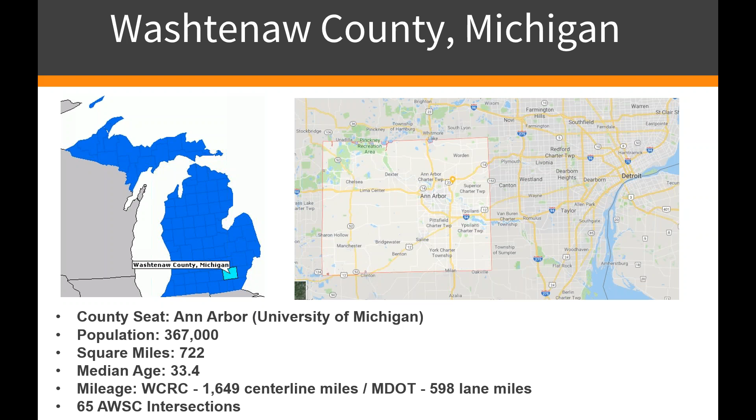So why do we build roundabouts? Well, Phil kind of alluded to this in the beginning. We have safety, and we all know about the Insurance Institute of Highway Safety, what stats they provided dating back well over a decade on what benefits roundabouts have to offer the community. Improved efficiency - not always, but in many cases roundabouts can streamline traffic through an intersection better than a traffic signal can. Can be better for the environment with fewer emissions into the atmosphere from idling vehicles. You have opportunities for enhancement within the center island. But all this can come at a cost.

People like to say roundabouts are always cheaper than a traffic signal, and that's frankly just not true. It all depends on circumstances. A traditional roundabout, depending on who you ask, is plus or minus $1 million. I talked to a gentleman from Connecticut, and he said it was $2.3 million to build one out there for a single lane - he can't even look at it. And that's for everything: design, construction. So it can really be detrimental to a budget.

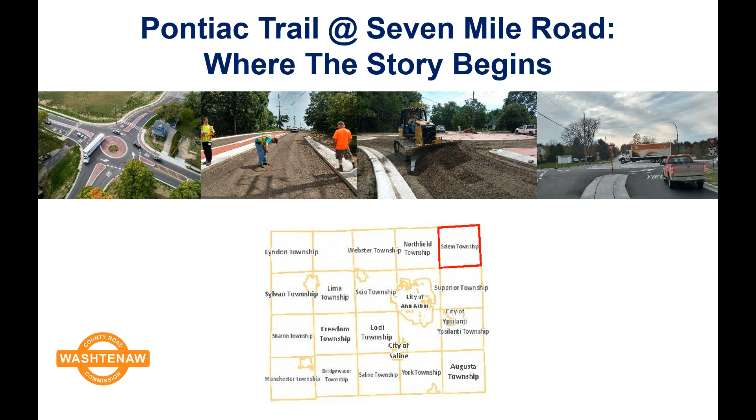So where the story begins: Pontiac Trail and 7 Mile. You see below the county, I've got 20 townships in Washtenaw County. The upper northeast township, Salem Township, is where Pontiac Trail and 7 Mile is. It's an all-way stop controlled intersection. In 2014, we planned to build a traditional size roundabout there, ICD about 140. You can see the party store that is on the right corner there. They weren't so much problematic as, ironically, was the west side of the road, which is the left side, where you see that open area. That's commercially zoned property, and the gentleman that owns both those quadrants there on the northwest and southwest corners wants to build some commercial stuff down the road.

So that's not cheap land. Here's the footprint that we had. Pontiac Trail is the road that goes north and south, 7,600 vehicles per day. 7 Mile going east to west, 4,600. Design speed was 55 miles an hour. Pontiac Trail is a route for a bedroom community from South Lyon to Ann Arbor, so traffic comes south in the AM and goes back north to South Lyon in the PM as people leave their jobs in Ann Arbor.

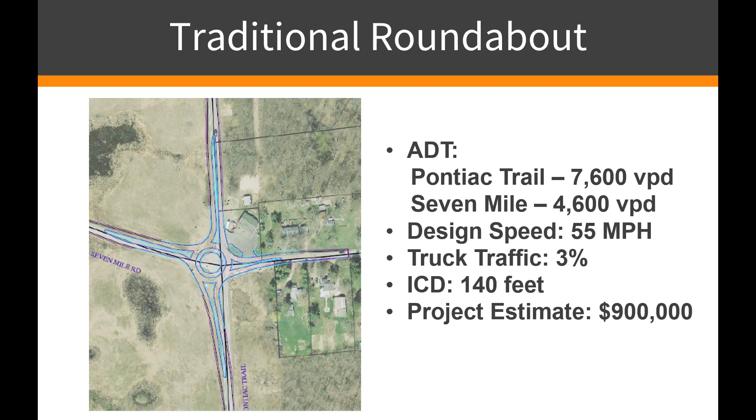The estimated project cost was $900,000. We had a CMAQ grant to reduce emissions out there. The problem we ran into, as you can see from the square footage per quadrant, the party store really wasn't problematic. I was anticipating problems, so I told my designer, here's the limits of your sandbox, and you really need to stay away from that party store. They did a great job. I'm not going to do a total take on a party store—that would be very expensive.

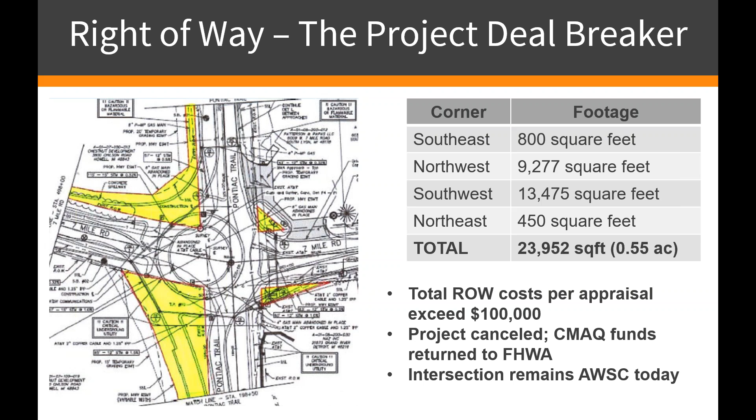So that meant we ultimately went to the west. When the appraisal came in, it exceeded $100,000, and we were not anticipating it to come in that much. The property owner was demanding $300,000. Bottom line, we were not in any position to come close to a number they'd agree to for us to get right of entry and go forward through the MDOT bidding process. So we ultimately had to cancel the project and return the funds. To this day, the intersection still sits as an all-way stop control, which is too bad, because it's the number one highest priority intersection for congestion, and it's still the same way.

Six months later, my bosses came to me on a project called Textile Road and said, 'Hey Mark, what do you want to do, traffic signal or roundabout again?' Pontiac Trail and 7 Mile was in my mind, and I thought to myself, are we going to go down this same potential path where we eat up a lot of cost and maybe have to return money, and this is going to be problematic? Or do we think of something new? Do we live outside the box?

I remembered a presentation from Wei Zhang about mini roundabouts. Wei, you're out there, hello. I thought, can we do a mini here? I proposed that to my bosses, and they all looked at me like I had a third eye on my forehead—this was in 2014. Ultimately they gave me time to investigate. I called up Wei Zhang and said, I have a proposal for you. He looked at it and said, yes, this is going to be a beautiful proposal. This is going to work and work well for your intersection in Ypsilanti Township.

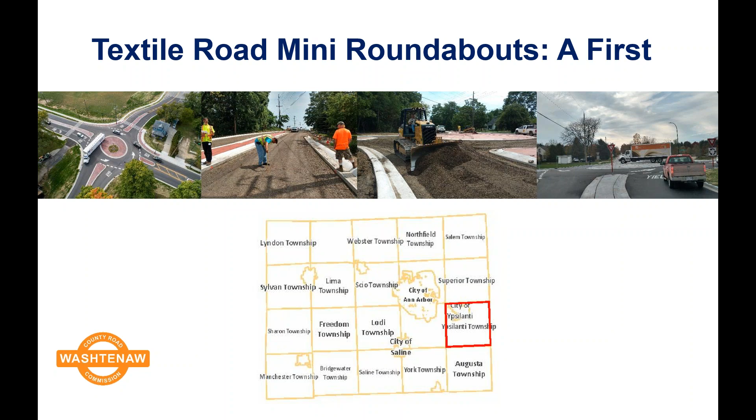Here's the layout. Textile Road goes left to right across your screen, Stony Creek is on the angle, and Hitchingham is the north-south road from bottom to top. We had high-speed approaches, 55 and 45 mile-per-hour design speeds. There's a charter school on Hitchingham Road to the south. Both intersections on the south side of the triangle, not the north, were all-way stop-controlled. It backed up to the point where it took 30 minutes just to get from one side of the intersection to the other through the queue—a major problem.

Interstate 94 is to the north, so whenever there was a traffic closure there, people would alternately use Textile Road to get around it, making it problematic throughout the year. This is ultimately the mini design we came up with. ICD was 90 feet.

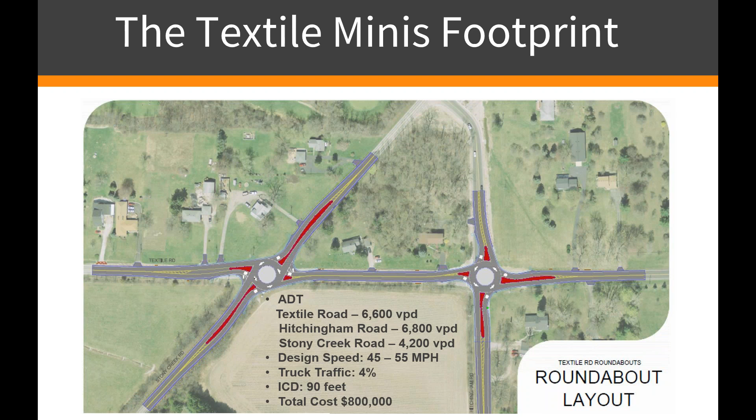ADTs with Textile, left to right, 6,600. Hitchingham, to the right, 68. Stony Creek on the angle, 4,200. Design speed, 45 to 55 miles an hour. Truck traffic was pretty small. The big takeaway: each roundabout, 1 or 2, was $400,000 to build at bid price—that's pretty remarkable. So $800,000 total to provide 2 roundabouts, versus plus or minus $1 million for one traditional roundabout.

Now here's the big takeaway I'd like you to take a look at: slivers of land, not chunks. Recall from Pontiac Trail and 7 Mile how I needed quite a bit of square footage to build that roundabout with an ICD of 140.

In this case, my total acquisition costs to secure easements or temporary grading permits was $3,757. What does that translate into? It means you have more money to build more improvements, purchase more equipment, do whatever your needs are. The pie is the pie. We all know the resources never get bigger, they only shrink with inflation over time, but our needs never go down. By building this smaller size roundabout, we found we can build them faster, design them quicker, get the right-of-way quicker, and they don't cost as much. These are all wins, and they're less intrusive to the property owners directly adjacent to the roundabout.

They do break, meaning if you have an ADT of about 15,000 or greater, they will break. So you don't want to put these in at, say, a 25,000 ADT intersection. They shouldn't be placed everywhere, so you've got to make sure you put them at the right spots.

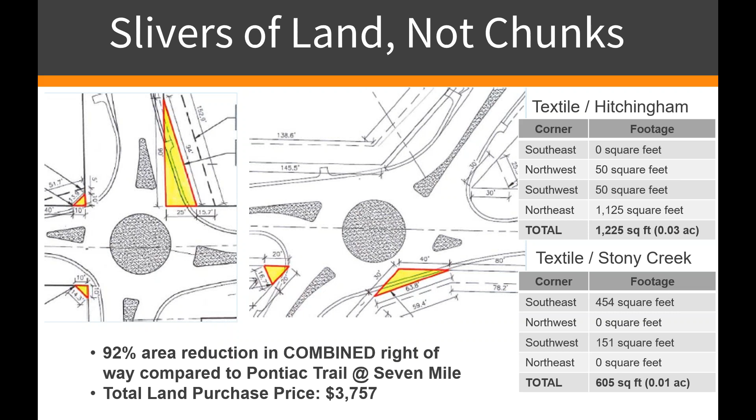So right now we're a little leery to do anything other than all-way stop controls. But as you saw from one of my earlier slides, I've got 65 of those intersections across the county, so I have no shortage of places to place mini roundabouts. That's not the focus of this presentation, so I don't have many slides on that. That was just kind of the big one, and ultimately it turned out great, a big success. People liked it. It worked.

The congestion that took 30 minutes to get through was less than a minute, and we built more and more to the point where Moon and Bemis, which we're going to focus on right now, was my 7th mini roundabout. I should preface mini - when I say mini, technically I mean compact urban, which is in the range of 90 to 100, 110 at the outer limits, versus minis, which are under 90. So I built compact urbans for commercial routes, and I built minis.

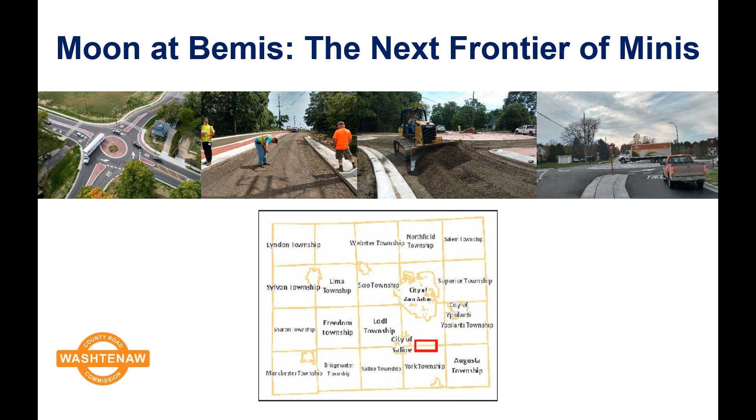Fast forward now from 2015, when Textile Road was built, to last fall - my board allotted us $300,000 for an intersection improvement. Staff, you figure out how to deal with it, we're not going to micromanage you. So management came to me and said, Mark, what are we going to do for 300? I said, well, you're certainly not going to build a traffic signal with a left turn lane, because that's not going to work - you don't have the budget for that. And $300,000 was going to be kind of tight, challenging just for a roundabout, because the last project I showed you at Textile Road was $400,000, give or take. So I had a challenge, and it was a challenge accepted. That's what I had to work with.

In 2017, when this was an all-way stop control intersection, there was a death at this intersection on July 2nd, where one motorist flew through a stop sign, hit another, and there was a fatality - very tragic. So our project goals: we want to enhance the safety.

I live about a mile from this intersection, so I monitor it multiple times a day. That's not the reason why we chose it, it just happened to be that way. We also wanted to eliminate peak hour delay - it takes 15, 20 minutes to get through this intersection when it was an all-way stop control at the AM, PM peak, depending upon the direction, because it was a feeder to the Saline campus schools.

Because I only had a $300,000 budget and not a lot of time to build this, my goal was to acquire no permanent right of way. I needed grading permits, but I didn't want any permanent right of way needs. I wanted to use the lowest possible cost using curb and gutter, because if you don't use curb and gutter, it's hard to retain people when they're turning corners. I had to accommodate truck traffic - this is Bemis Road, as you'll see in a minute, which is a commercial route from east to west - and I'd have to do that using movements over the center island.

I'm presuming you all know on many roundabouts, the central island is designed so truck traffic can maneuver left over them. But here in Washtenaw, you can build them flush. The Textile ones I did in the previous slides, that was a flush center island. Since then, I've raised it 3 inches, and that's enough to discourage motorists from driving over there, but the trucks and farm equipment can.

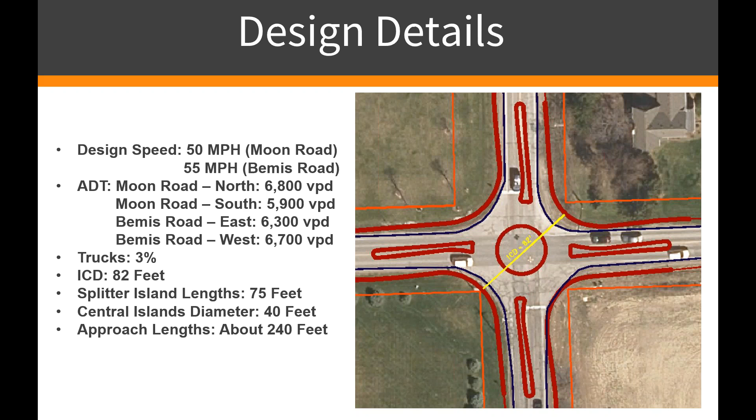Splitter island lengths, normally they're in the realm of 250 feet. So these shrunk them down to 75 feet in length. Diameter of the central island is 40 feet, and I only went, give or take, 240 feet in each direction from the center of the intersection for construction.

So let's talk about the construction means and methods. In order to keep this on budget, I don't have a budget to dig away, haul away, and put new material in. So I wanted to utilize the material that was there. I crushed and shaped it, pulverized the road with the pulverizer, so I got that asphalt down to granulars—you can see in my hand there on the right. Once that's done, we grade it, we shape it.

Underground, this is another thing: piping. Underground piping can be very expensive, and I needed to limit that. Ideally, I'd like to have none at all, but that just wasn't realistic in order to get water from point A to point B. In the northeast corner there, the water held year round. It wasn't going anywhere, so I had to get rid of it somehow, and the only outlet I had was to the south. So I limited my piping, but the more you can do just with curb and gutter and spillways, the cheaper your design's going to be. That's something you want to reflect upon when you design an affordable roundabout.

So we're rough grading the splitter islands here. You can see the grade stakes that represent the island. They're basically getting things ready for cutting it down to a grade for asphalt—well, actually, no, excuse me, they're putting in for curb and gutter. The grade is to the left and to the right, as you can see what it's going to be.

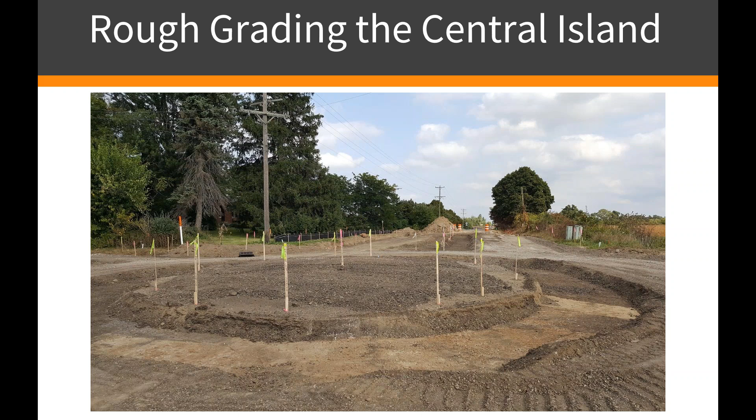Time to pour the concrete, so we got everything formed. These islands are roughly 3 inches. We did them in 2 pours. For those of you in the Michigan area, this is MDOT B2 curb and gutter. And then we just filled in concrete in the center after it was poured, once we got a 3-day break on it.

It can be challenging to pave any type of roundabout, but these mini roundabouts can be even more problematic. So it's really important that you sit down with your paving contractor and talk over your options as far as what you can and can't do, where you want your joints, your seams, how you want to make your pulls, where your trucks are going to come from in and out of the site. Do you have any no-truck routes? These are all types of things to consider.

Do you have any overhead utilities that are in the way? You can see how they're getting asphalt in the hopper. He's got a little John Deere tractor with a front end loader, takes that up to the back of the hopper of the flow boy, gets his bucket filled, and goes back and forth, keeping it moving. That's how you pave the mini roundabout, because there's no way you can get the flow boy through that intersection. It's still even difficult to get a single unit truck in there.

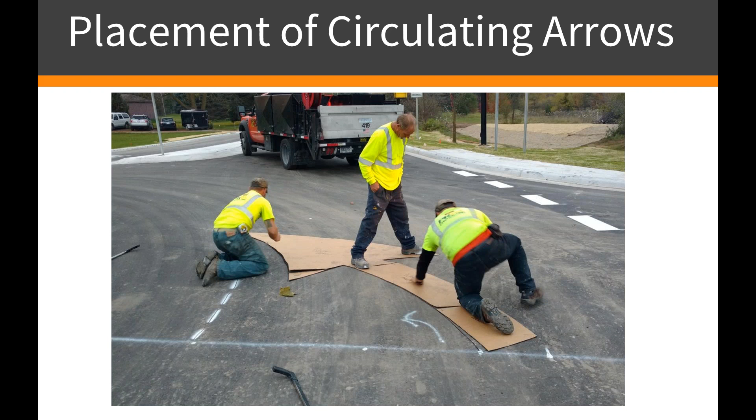So this is the final product of Moon and Bemis. It took roughly - we started right after Labor Day, the day after Labor Day. There was, in Michigan, a work stoppage that did affect us somewhat. Long drawn out story, don't want to get into that, but ultimately we couldn't do any work for 2 weeks due to union contracts being locked out. So it was really problematic statewide, pushed schedules to the limit on the back end, and we were able to finish right around November 6th.

All things considered, it worked out pretty well. Probably could have finished this job 2 weeks earlier had the lockout not occurred. So we took some drone footage, and you can see here, this is about 1:45. Sight distance is pretty good.

So immediately on day one, I started getting overtracking, and I got overtracking in all 4 quadrants. Shocking? No. I was a little bit optimistic that it wasn't going to be this prevalent, this bad.

So what I ended up doing after the fact, I got the contractor back out there. This is all built into my price of that $300,000, where I cut out 3 foot wide, 12 inches deep, and I put stone back there.

Now one of the things you may ask is, hey Mark, why didn't you put concrete in? Well, A, time of year wasn't great. B, you should recall in one of my previous slides, the right-of-way, the corner was pretty close to the back of that curb. I didn't want to put a permanent feature outside of the road right-of-way. I didn't want to have to negotiate with the property owners after the fact. The grass is going to grow through that stone eventually.

And I thought to myself, this will work. And it's still working to this day. The property owners haven't called me and complained about it. So I think it was a good trade-off after the fact in order to fix that, and we're not getting any more overtracking problems.

You can see the scarring from the truck traffic on the curb and gutter, but that's going to happen when you have the tighter radius. When you're in a tight urban environment in the city, you're going to get that anyway.

Now this one took me by surprise, I didn't think about this one - choosing your design vehicle. I was out here that day with that GoPro camera, I probably took 75 video shots that day. And the one thing I noticed with the ready-mix concrete trucks was, here in Michigan, I know some states may have 4 axles, we got 5 rigid axles here in Michigan.

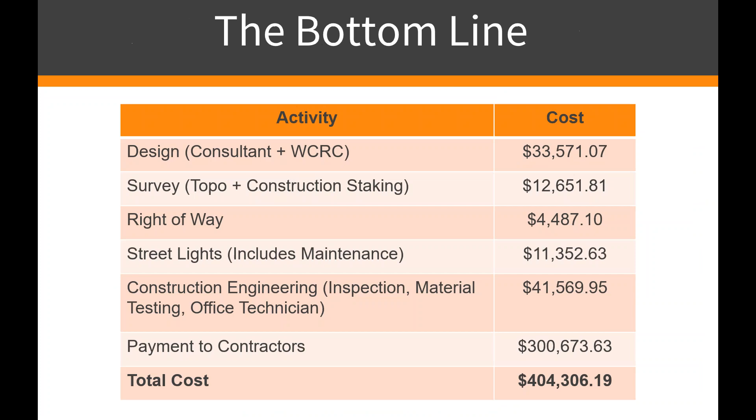One thing people remark on Facebook is that they don't see the 15-mile-per-hour speed plaque sign underneath the roundabout ahead sign. I'm going to put a special pavement marking, like you see with the interstate shield, to get people in the right lane. I'll make that plaque yellow and black, 15 miles an hour in advance, and see if that grabs people's attention. I also want to make those optical speed bars bigger and see what effect that has.

We did consider other options. You can always put speed humps or raised crosswalks for some areas. I don't have pedestrian traffic here, but some type of physical feature, if the drainage works, to slow that traffic down is something we'll consider in the future if things become problematic. Right now, it's fallen within the projected 12 to 15 range, so I'm not seeing the need without the injuries. But that's something to consider if you don't have a lot of deflection - put in those raised crosswalks or speed humps, whatever you want to call them.

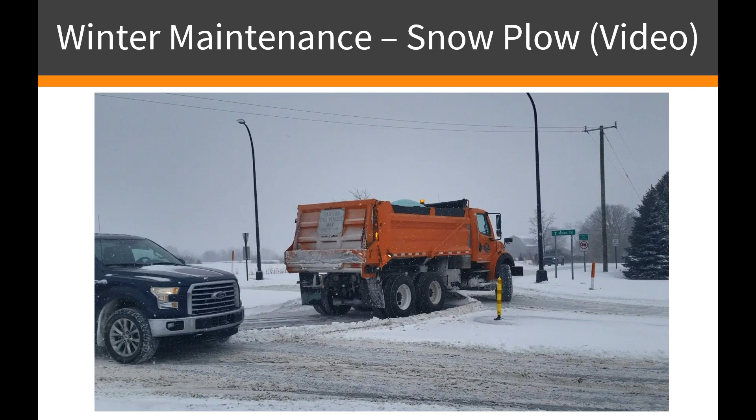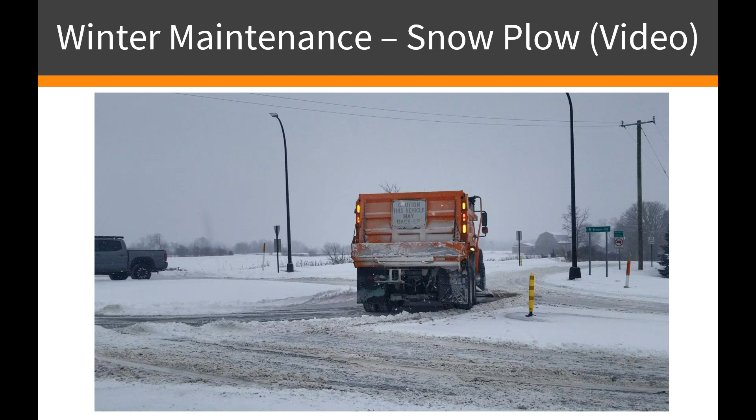While this is playing, can you touch on the sight distance approach, and is that for the 15 to 20 mile an hour design speed? Yes, the answer is yeah. For these mini roundabouts, what I've been taught is you go back 50 feet from each yield line, and if you can see from point to point, you've achieved minimum acceptable sight distance for a UK mini-style roundabout. Again, AASHTO really doesn't touch on an all-way yield control intersection, so we had to use what guidance we could. We felt like, well, they're all over the UK and they're no dummies over there, so if it works for them, I think it's going to work for us. And so far, so good. They were the pioneers of minis.

More could be better. You don't want too much, though, because if you give drivers too much sight distance, they become complacent and try to make decisions too far out in advance and make mistakes. So you want to be within that sweet spot. Obviously, 100 is great, but 50 is the absolute minimum.

Regarding the collisions, you had 15 PDO crashes in the mini. Do you have 12 to 15 on average a year? Every year is different. Do you have a comparison for a single lane larger roundabout in the county? Good question. Probably in the realm of 8 to 10.

There's another question as to why they use 15,000 vehicles per day as an upper limit. That would be a question for him, he's the expert. Right, I trust it.

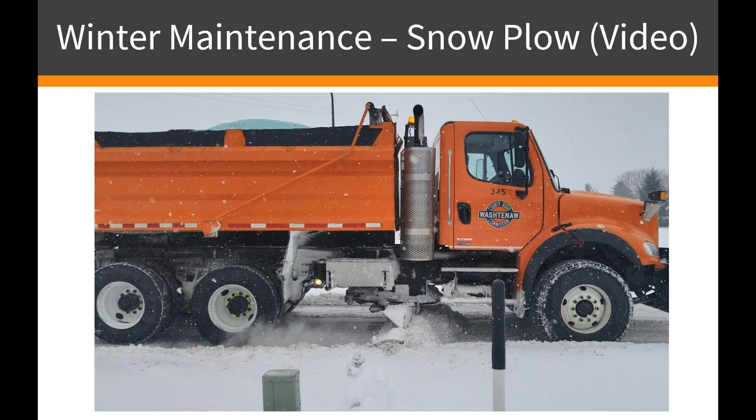How was stormwater handled? I believe you addressed that in some of your questions, but did you want to elaborate on that?

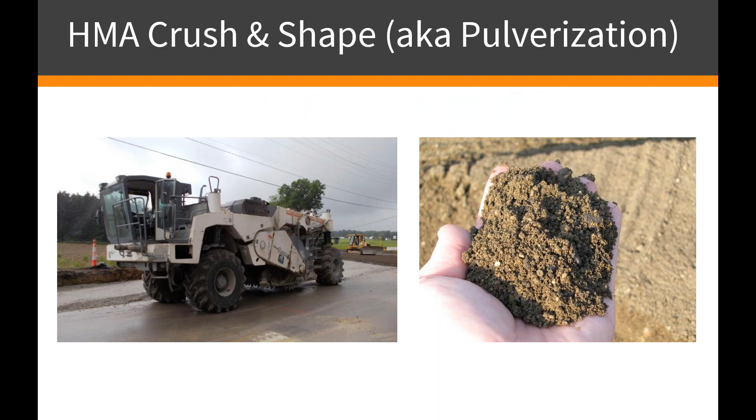You might ask, how does the water get off? In other areas, I have spillways on the ends of the curb and gutter on the low sides. High sides, I don't need them.

At what ICD do you eliminate landscape in the center island? Well, for minis, you can't have landscaping because you need that area for truck traffic, in order for farm equipment to make those direct lefts.

We have an ICD of 100 in Dexter, and it has a small envelope, say about a radius of 5 feet, that Dexter was able to use. We did turning radiuses on it. I don't know, every intersection is unique. There's not a cookie cutter response to that. It all depends on the angles that you're coming in and coming out at. But, you know, do a turning movement template, create envelopes.